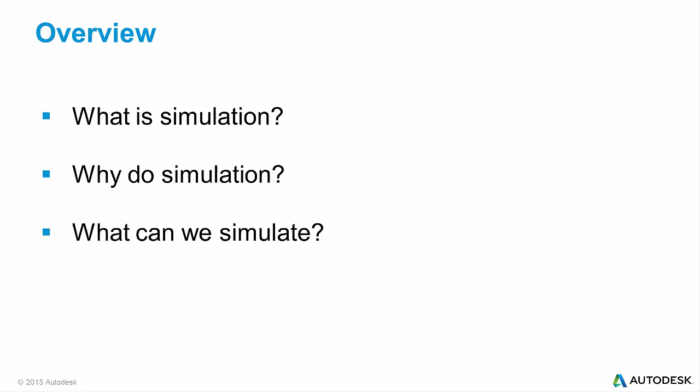It's good to begin our discussion with a proper definition of simulation. Here you can see the Britannica version, which defines simulation as a research or teaching technique that reproduces actual events and processes under test conditions. They further state that developing a simulation is often a highly complex mathematical process.

Let's apply this definition to product design and view it from a timing perspective. When the FEA method was first introduced as a means of performing mechanical simulation, the technique was applied to reproduce results from an event that had already taken place.

That is, something that already happened in the past. This certainly proved to be a valuable tool for determining what went wrong following a design failure, but in a sense, it was originally used as a study that was forensic in nature.

As computing power grew exponentially and software technology evolved, engineers adopted a more proactive approach to applying simulation. This comes from the realization that it's far more cost-effective to use simulation as a prediction of how a design may perform in the future, rather than as a means to reconstruct why it failed. This upfront approach provides the greatest return on investment and also leads to dramatic design innovation.

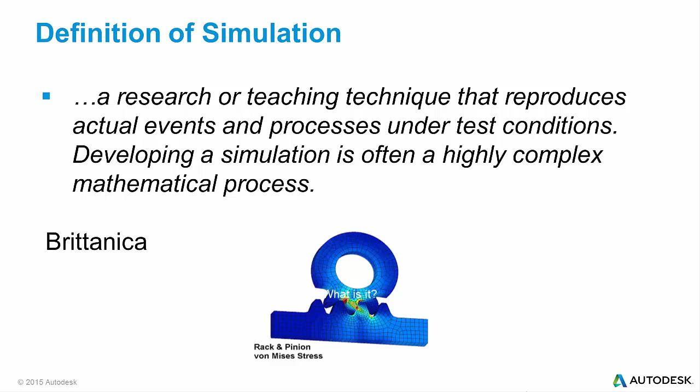When we apply the concept of simulation to engineering design, the most common methodology in use today is called the finite element method.

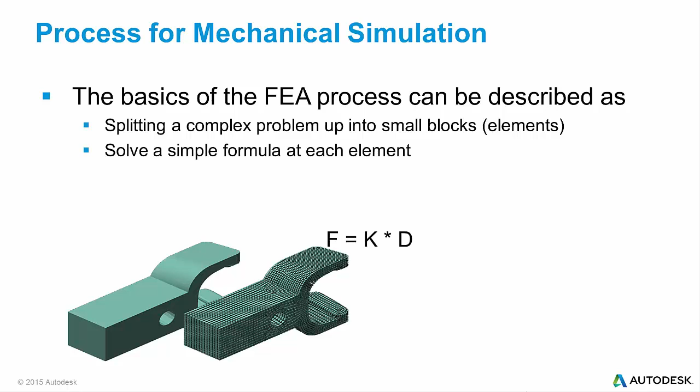This is a mathematical technique used in Autodesk software. It takes a complex shape and divides it into smaller, simpler blocks called elements. The method then solves a simple formula at each element, combines the answers together to yield a result for the entire object. The results can be viewed numerically or, better yet, displayed as a color contour plot, shown here at the bottom right.

The goal of mechanical simulation is to predict things like stress, deflections, thermal loads in a structure or component. We want to do this because too much stress or deflection can cause the structure to fail.

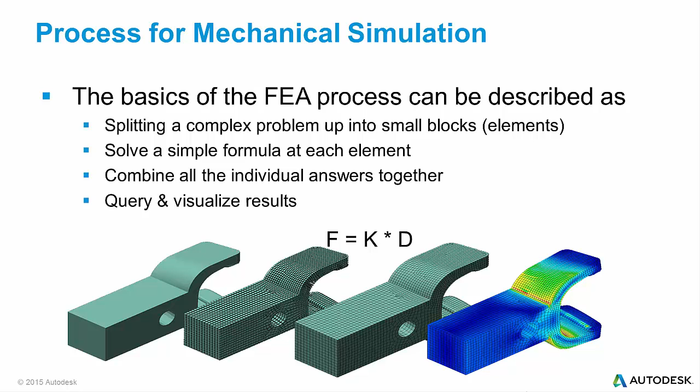There are three key user inputs required when solving mechanical simulation problems, shown here as the blue boxes we'll be building on the left side of this workflow diagram. First, a geometry representation of the design is needed. This is usually developed using a 3D CAD system, such as Inventor or SolidWorks. Most of you are quite familiar with this type of computer-aided design and have seen impressive models developed using Inventor.

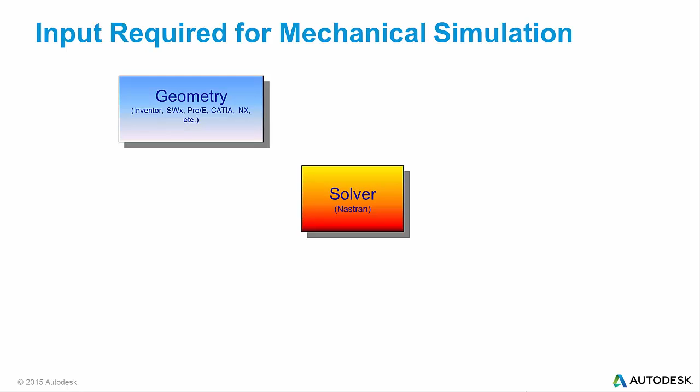Once the geometry is completed, the user must define what type of materials are being used in the design. For example, is this object made of steel, aluminum, or a specialty composite? Each of these materials have different properties that define how much they will resist or bend when forces are applied, so it's important that accurate material data is used.

Finally, the third input required is the operating loads or boundary conditions. In this step, the user can place different forces and loads on locations in the design and also indicate what regions of the geometry are constrained or restricted from movement.

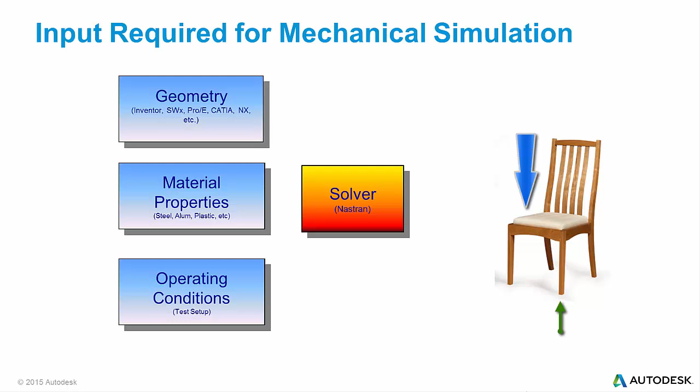Think of the simple example of a chair. The load may be 500 pounds of force applied in a downward direction to the seat, while the constraint tells the program that the bottom of the chair legs are sitting on a solid floor and therefore can't move downward, and they will resist the force.

Once the geometry, material properties, and operating conditions are set, the problem is submitted to the In-CAD solver, which in our case is Nastran. The solver then calculates the stresses and the deflections for each element, reassembles them, and provides predicted values for any part of the geometry.

Using these answers, the designer can then check his results against desired performance. The beauty of doing simulation on a computer is that it's a very repeatable process, and the user can change input variables to see how they affect the result.

This means you can play many what-if games and try different geometries, different materials, or even different load cases, all without building a physical prototype. This significantly narrows the scope of testing and also allows for much greater innovation.

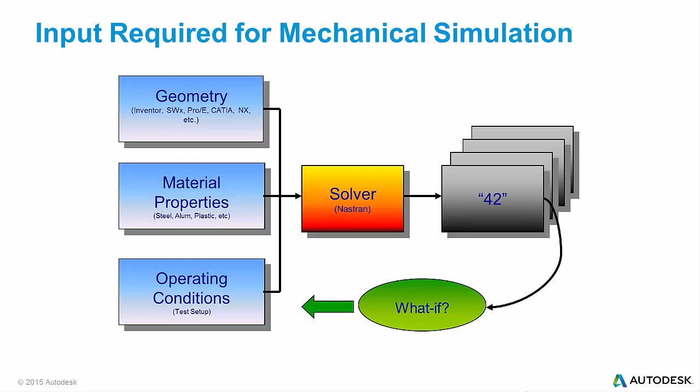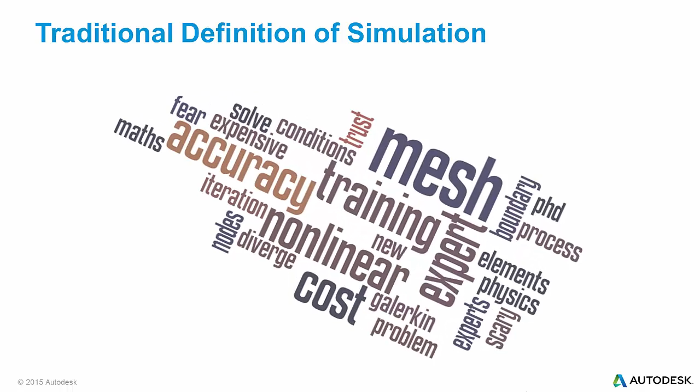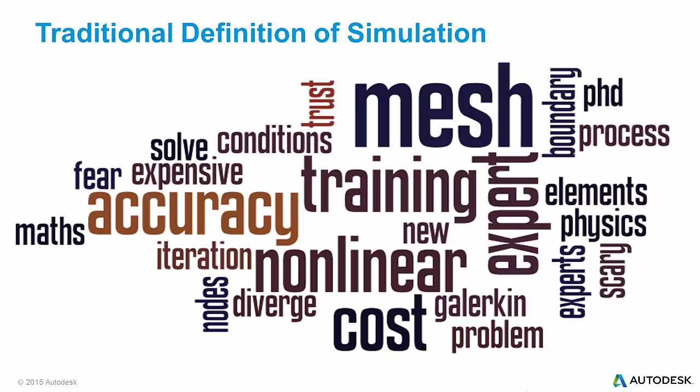It's important that you realize, while these terms are useful to the engineer, they're much less relevant to the executive management at your customers.

When we discuss simulation at Autodesk, our focus is on the benefits rather than the technical features. Simulation is all about creating better designs so that your customers get products to market faster, which are lighter, stronger, higher quality, more reliable, and more innovative.

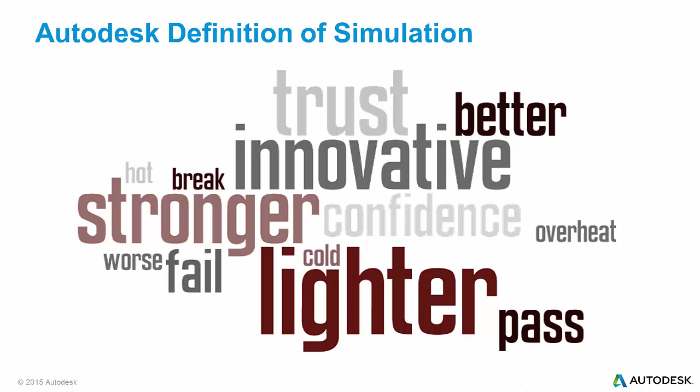Let's look at how simulation fits into the traditional design process and explore further why your customers should be using it.

Why do simulation? It's important that you can answer this question for your customers, especially those who are not using simulation today. Traditionally, design engineers have made physical prototypes and destructively tested them to see how they perform. This is generally expensive and time-consuming.

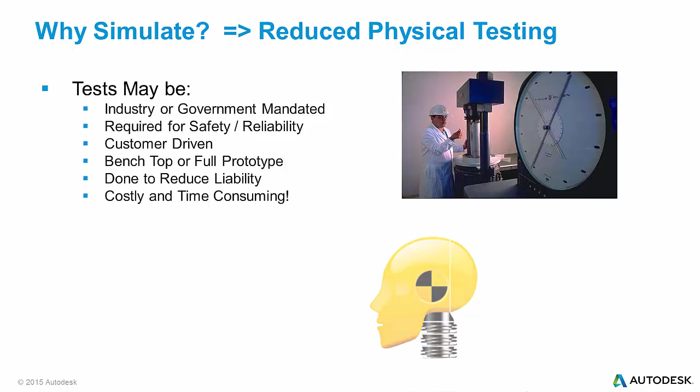Let's take a closer look at the issue. In most cases, your customers' products are required to pass industry-defined tests in order to be accepted for commercial release. Testing requirements may be driven by government or industry regulations and often focus on improving product safety and reducing liability. Some common test types include strength, thermal, vibration, fatigue, and crash or drop shock testing. In all cases, these tests require complex equipment, monitoring, and setup, which takes a lot of time and is expensive. If a product fails, it may be many months before a new design can be developed, prototyped, and retested.

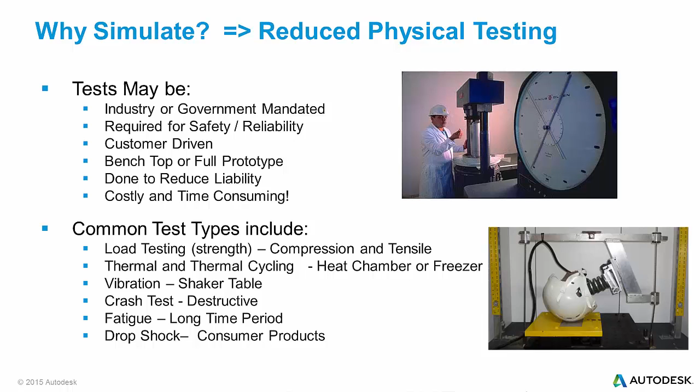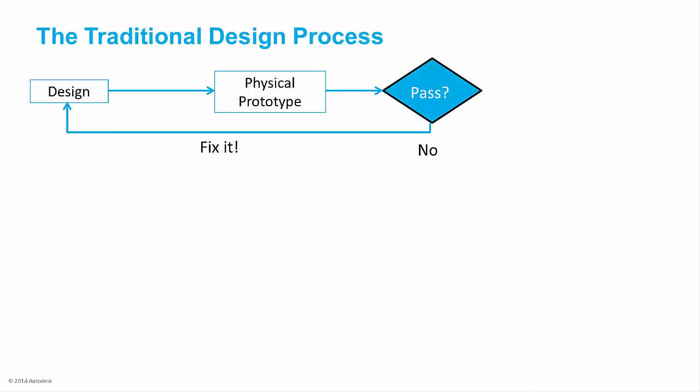The traditional design process relies on creating a design, building a physical prototype, testing the prototype, and then fixing whatever problems arise. The expression back to the drawing board was commonly used to describe the frustration of prototype failures. Design engineers have built up tremendous experience over the years and may rely solely on this test and break method to create a good design, but it's very unusual that only one physical prototype is made, and it often requires several loops of this design, test, and fix process. It's not only costly, but also increases the amount of time it takes to get a product to market.

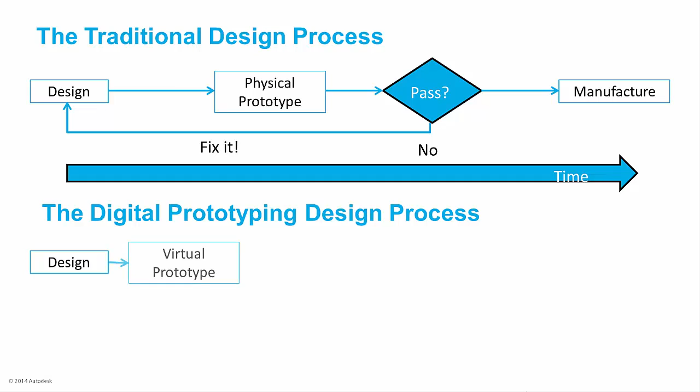Contrast that with a digital prototyping process. It uses the same engineer's experience together with computer simulation methods to create virtual prototypes. This leads to much smarter physical testing and greatly reduces the scope of testing that's required. It increases the likelihood of getting to market faster. Rather than the loop being made of fix-it guesses, it comprises what-if scenarios, which lead to increased innovation.

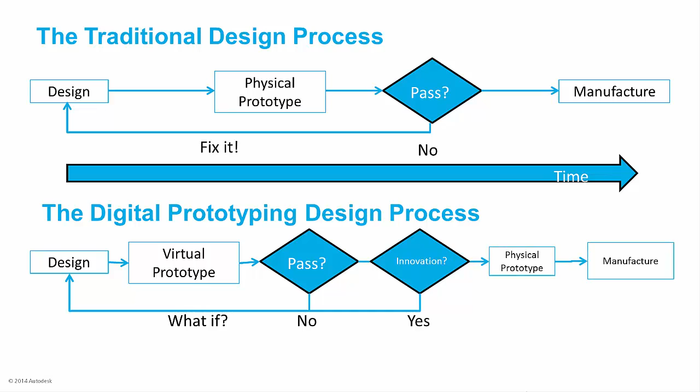The best news is that a very large percentage of manufacturing companies today, especially the small and medium businesses, have not yet implemented simulation into their design process. This untapped potential represents a very large opportunity for you.

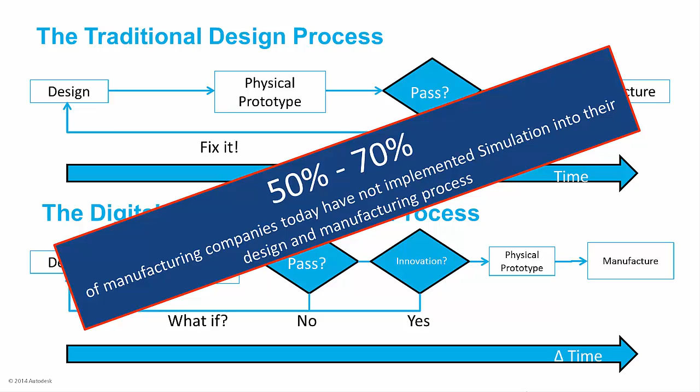In summary, the answer to the question why simulate comes from the tangible benefits that are derived. These include eliminating unnecessary cost, which is driving excess out of every aspect of your design.

Remove uncertainty from your timelines. Ensure that your product development process is efficient and get products to market faster.

Improve quality and customer satisfaction. This tool helps you have a better understanding of how your product functions and helps you reduce defects and deliver higher quality. Reduce unknown risks.

Simulation limits your exposure to failure and liability issues. And finally, secure competitive differentiation. Ensure that your employees have the tools to develop innovative products that keep you ahead of your competition.

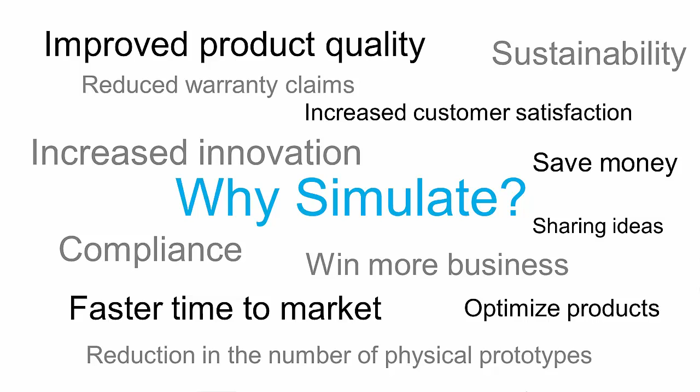Now that you understand what simulation is and why companies are using it, let's look at the types of problems that can be solved with Autodesk simulation, again with a specific attention on the Nastran In-CAD solution.

Autodesk offers a wide range of products that cover five distinct engineering simulation disciplines: mechanical, CFD, plastic injection molding, composites, and building structures. While CFD, or computational fluids, plastics, composites, and building structures are important, they won't be our focus today.

For the purpose of this session, we will concentrate on mechanical simulation as a discipline, not to be confused with the Autodesk simulation mechanical product. And specifically, we will look at how mechanical simulation can be handled via the Nastran In-CAD solution. This discipline represents by far the largest opportunity for you, our manufacturing partners, and it's an excellent fit for your Inventor customer base, and also competing CAD products such as SolidWorks.

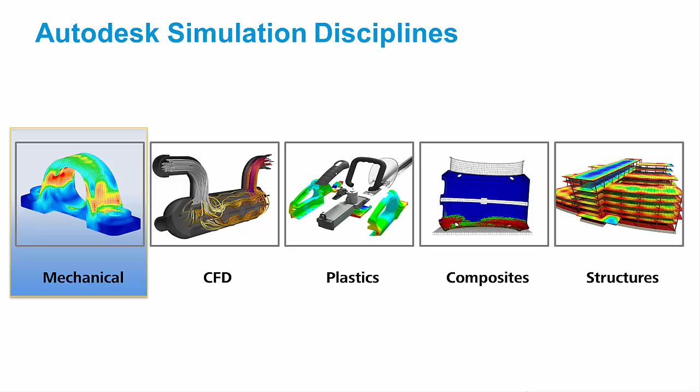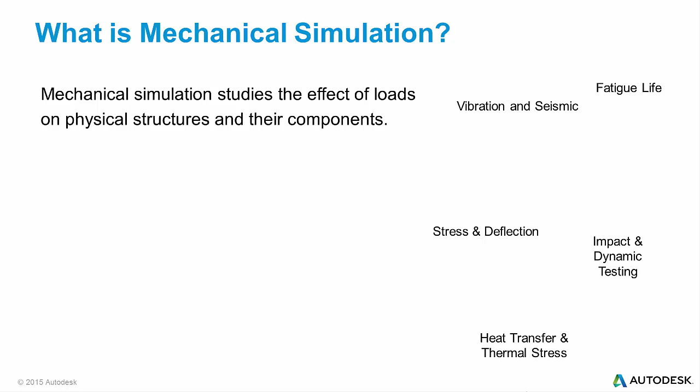The discipline of mechanical simulation is a rather self-explanatory term. Engineers use this type of analysis to examine the physical performance of their mechanical designs and see how much stress is created by forces and deflections. Included with mechanical discipline are dynamic and transient loads, which just mean that they can vary position, direction, or magnitude over time. Most products are subjected to this type of condition during normal use. It's also important to understand, for example, how much a design will vibrate and deflect, or its reaction to seismic loading.

Engineers also need to determine how long a product will last when subjected to repeated loading. This is known as fatigue life.

Another concern of mechanical designers are problems that arise due to heat. Most materials will expand when heated, however, they do not all expand at the same rate. This difference can cause very high stresses and lead to failure, especially when two different materials are fastened together. This phenomenon is called thermal stress, which is also part of mechanical simulation.

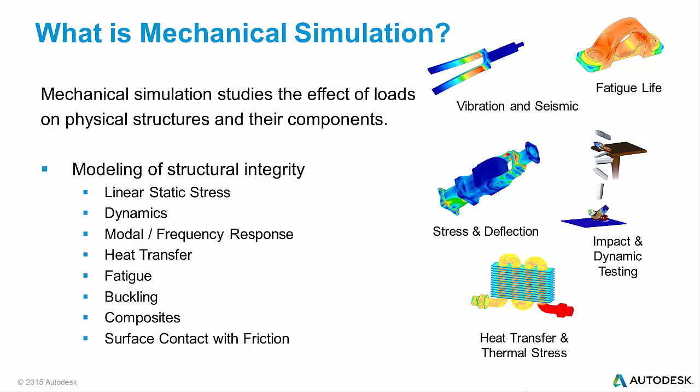All of the capabilities which I've just discussed are included with Nastran In-CAD.

Users of Nastran In-CAD can answer critical questions about the performance of their design. For example, will my part bend? If so, how much? Will it break? When will it wear out? Does it vibrate too much? How hot will it get? Can I use a different material?